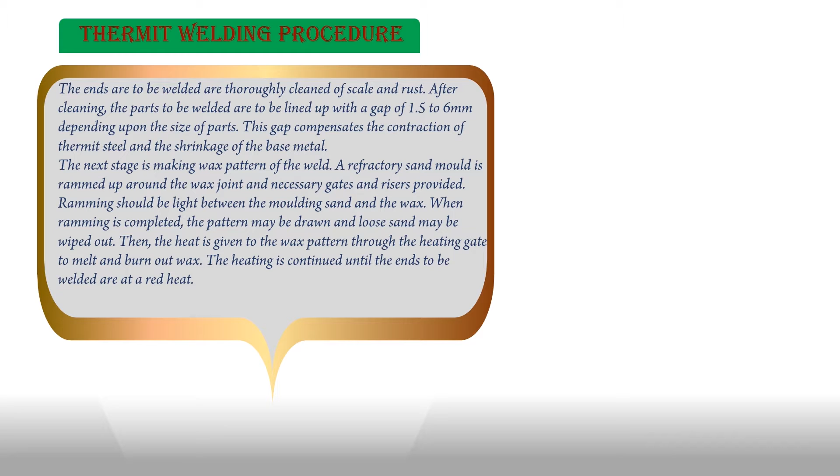Thermit welding procedure. The ends to be welded are thoroughly cleaned of scale and rust. After cleaning, the parts to be welded are lined up with a gap of 1.5 to 6 mm depending upon the size of parts. The gap compensates the contraction of thermit steel and the shrinkage of the base metal.

The next stage is making a wax pattern of the weld. A refractory sand mold is rammed up around the wax joint and necessary gates and risers provided. Ramming should be light between the molding sand and the wax. When ramming is completed, the pattern may be drawn and loose sand may be wiped out.

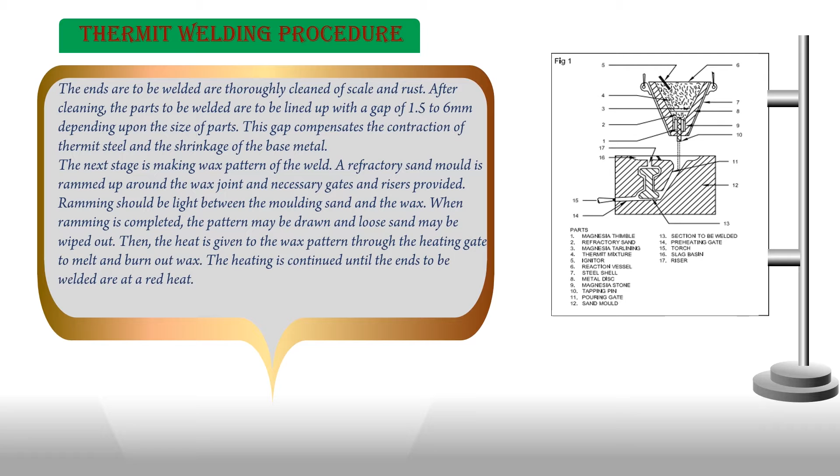Then heat is given to the wax pattern through the heating gate to melt and burn out the wax. The heating is continued until the ends to be welded are at a red heat. The approximate weight of thermit is 12 to 14 kg against 1 kg of wax.

The outside shell of the crucible is made of steel and is lined with magnesia tar lining. At the bottom, a magnesia stone and a thimble are provided through which the tapping pin works. The thimble is inserted in the stone, which provides a channel through which the molten metal is poured. For each reaction, a new thimble is used.

The thimble is plugged by suspending the tapping pin and placing a metal disc above the pin. The metal disc is lined with refractory sand. At the top of the thermit, low ignition temperature thermit is placed in the crucible. When ignited in one spot of the thermit mixture, the reaction spreads throughout the mixture. The reaction can be heard; as soon as the noise of reaction stops, the crucible should be tapped.

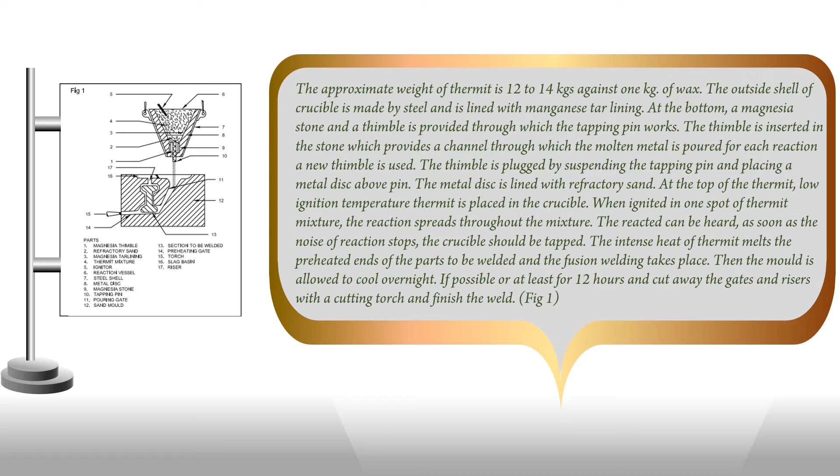The intense heat of the thermit melts the preheated ends of the parts to be welded and fusion welding takes place. Then the mold is allowed to cool overnight, if possible, or at least for 12 hours. Cut away the gates and risers with a cutting torch and finish the weld as shown in figure 1.

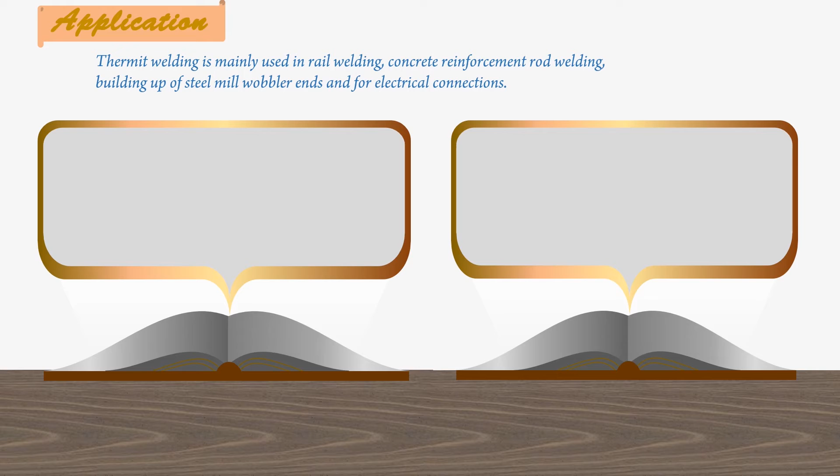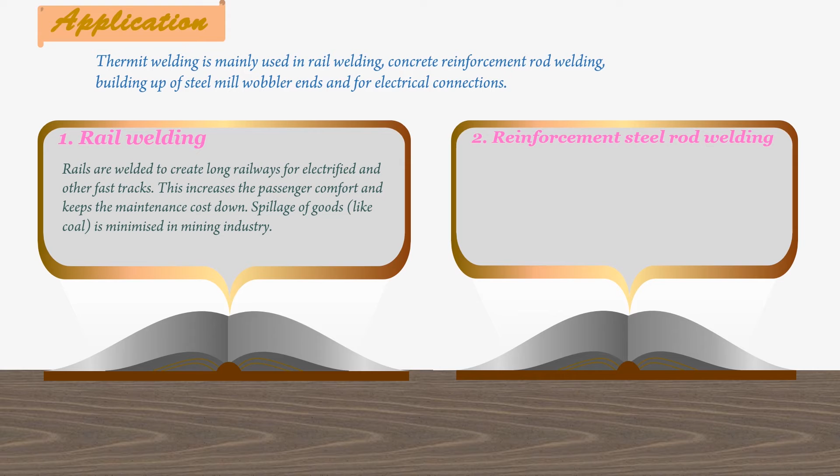Application. Thermit welding is mainly used in rail welding, concrete reinforcement rod welding, building up of steel mill wobbler ends, and for electrical connections. Number 1, rail welding. Rails are welded to create long railways for electrified and other fast tracks. This increases passenger comfort and keeps the maintenance cost down. Spillage of goods like coal is minimized in the mining industry.

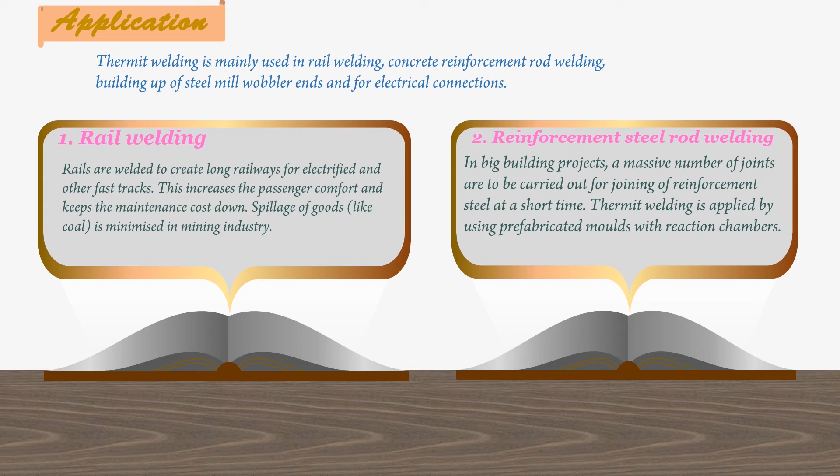Second, reinforcement steel rod welding. In big building projects, a massive number of joints are to be carried out for joining reinforcement steel in a short time. Thermit welding is applied by using prefabricated molds with reaction chambers.

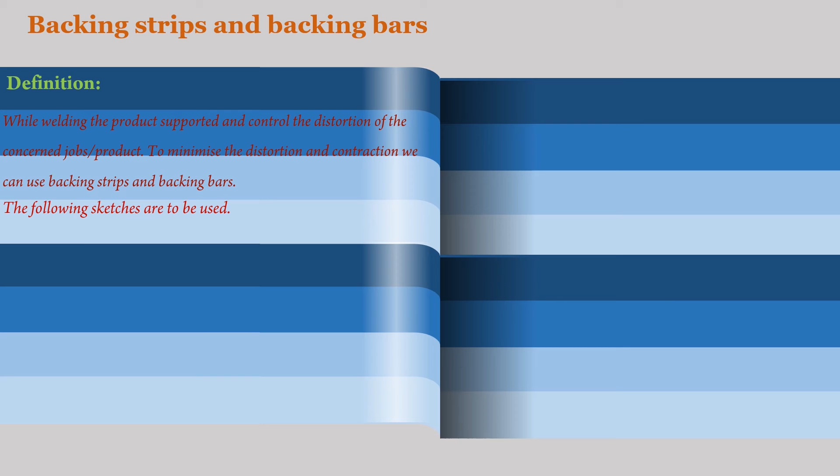Backing strips and backing bars. Definition: while welding, they support the product and control the distortion of the concerned job or product. To minimize the distortion and contraction, we can use backing strips and backing bars. The following sketches are to be used as shown in figures 1 and 2.